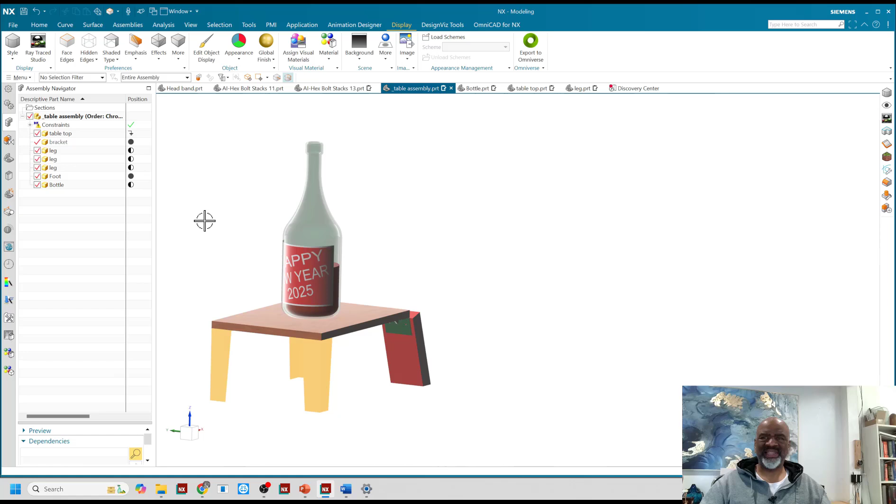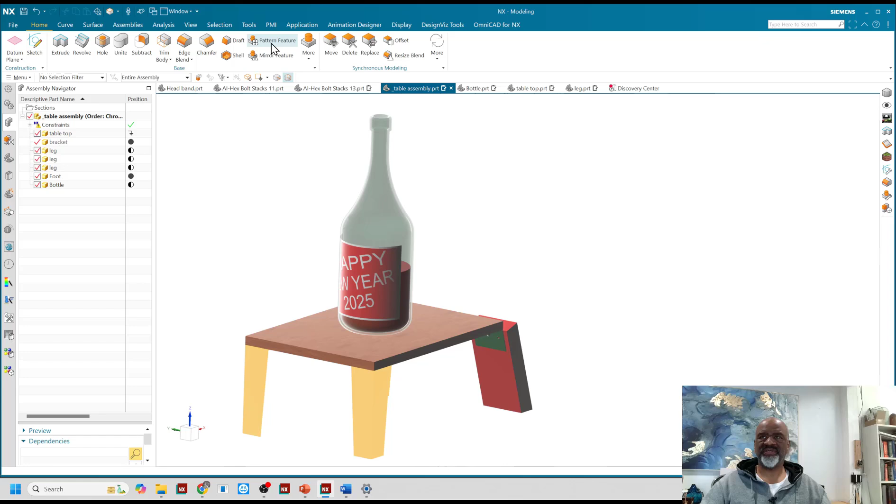Today I'd like to show you a really nice technique. In tools, there's a thing called fastener assembly, and a lot of folks that I know don't really use it. It's incredibly powerful, and in many cases, the best way to start is with a hole series.

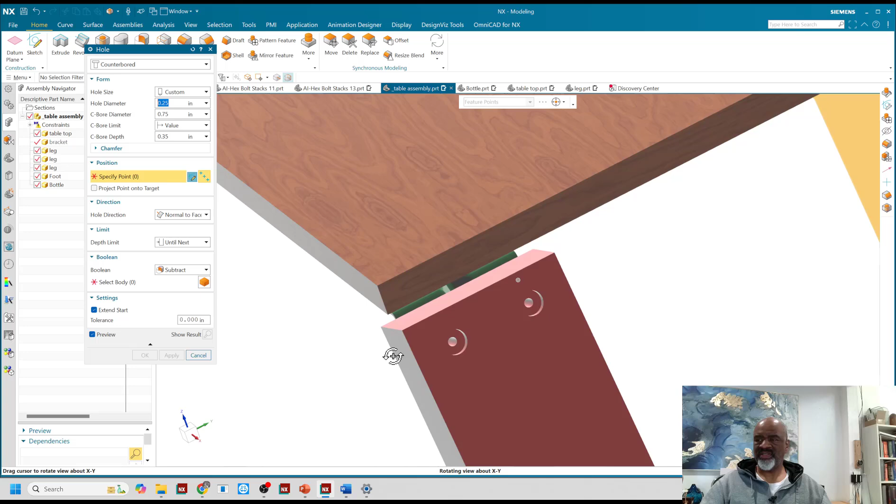I've got a piece of wood here, and I've got these brackets. I'm going to create a hole series that goes right through this piece of wood and into these brackets. As you can see, I've already created a counterbore hole that goes through this leg and through this green bracket. But just to show you how it all works, I'm going to go to the hole series.

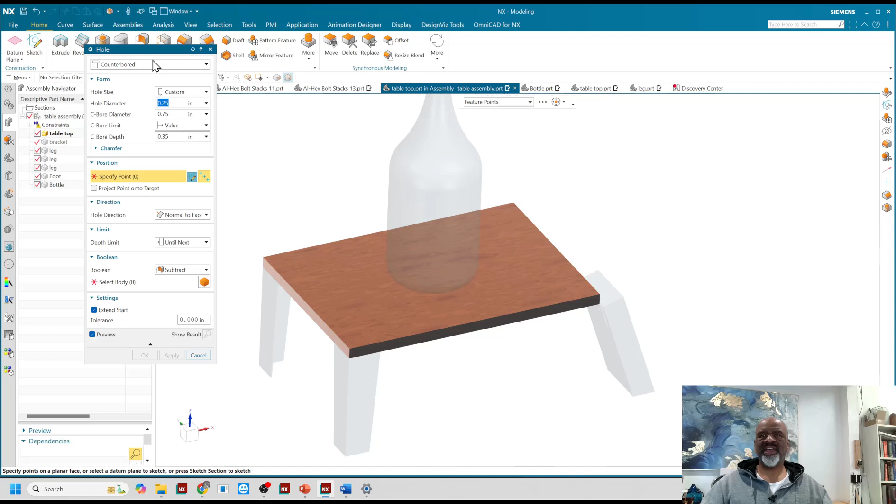Oh, before I do that, I'm going to navigate to the tabletop, because when you do a hole series, you have to navigate to the first piece of geometry that your hole is going to go through. So here I am in the hole command, and right here is the hole series. I love the hole series.

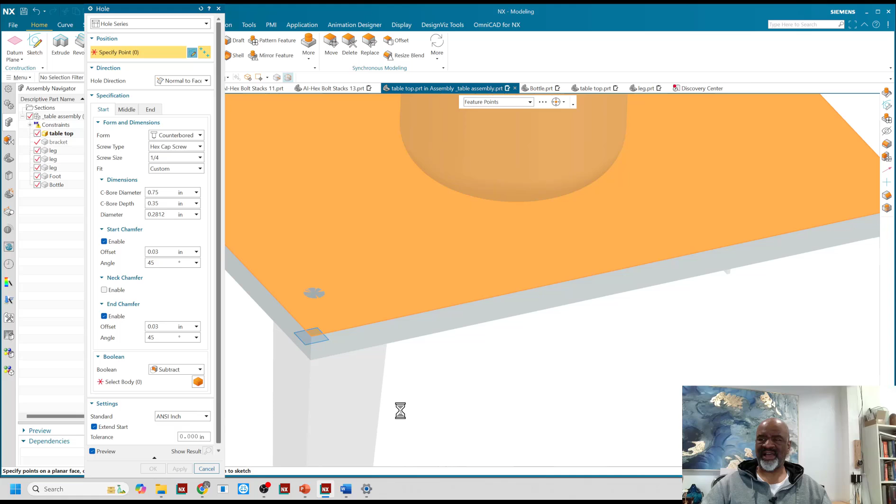And what I'm going to do is a counterbore hole that's based on a 1/4 inch hole diameter. And I'm going to place one right here on the top of the wood when it allows, right there. When I place holes, I like to then go to the sketcher, because the sketcher enables me to position the holes just the way I want, and it'll throw me into the plan view. Awesome. And then I can put another hole right there.

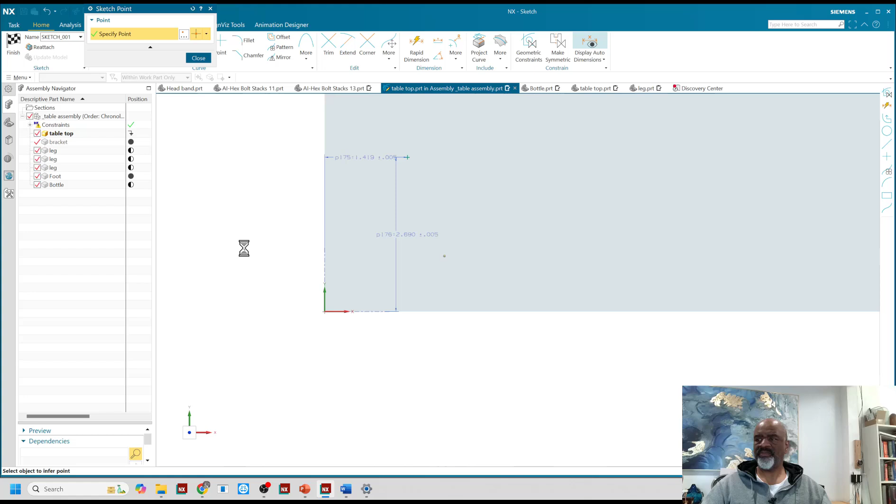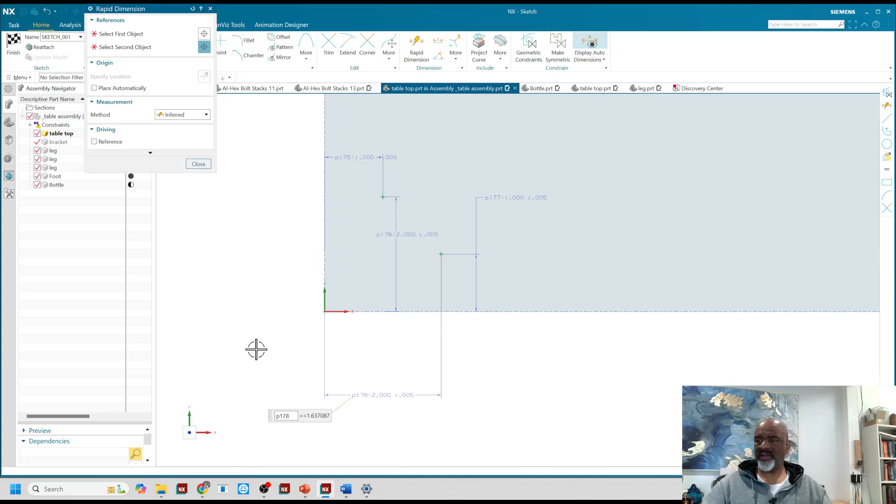And I know that the best location for my hole is if I have 1 inch away from this edge here, and 1 inch away from this edge here. There's a lot of processing of this wood grain going on, so it's reacting a little bit slowly. That's okay. So there we go. I'm going to put those holes there. So 2 inch, 2 inch, 1 inch, 1 inch. Good. Close. Say finish.

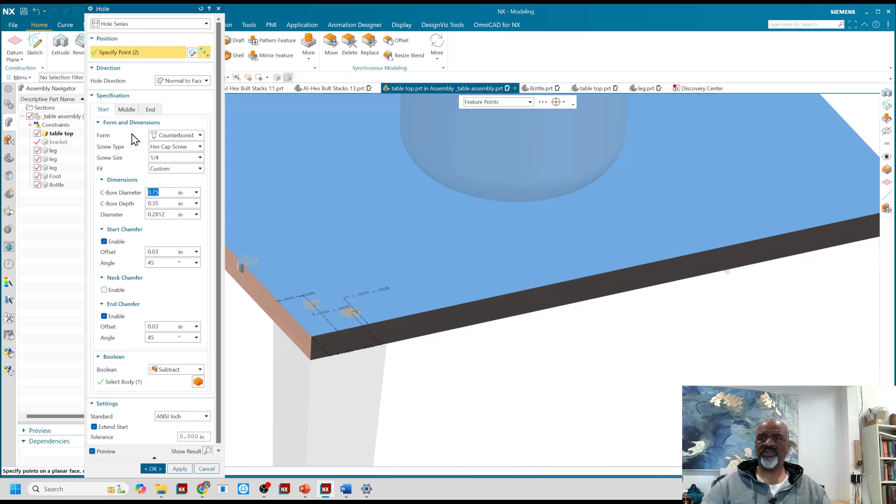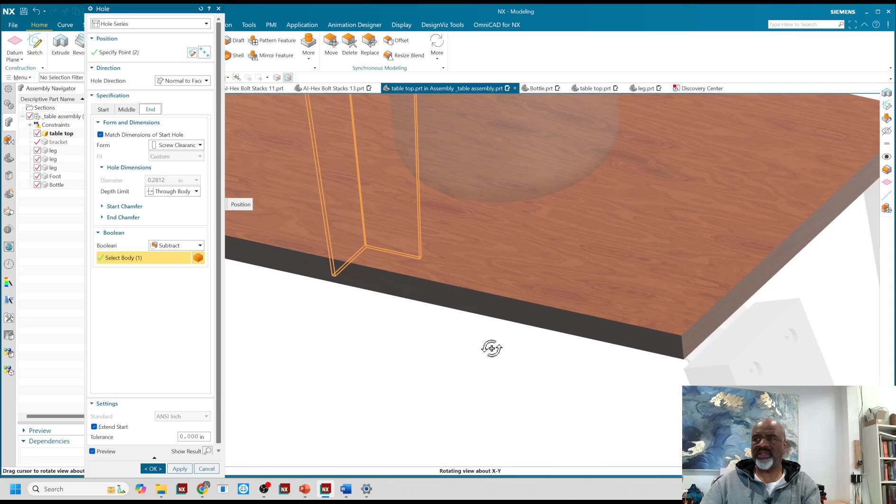All right. So now it's going to pop those holes in. The holes go into the start, if you will. And what it's asking me to do now is go through the sheet metal part. So I click on the end command, end, and I select the sheet metal part. I'm in the assembly now. And of course, I had made the table top my work part. And I'm going to now do a through body screw clearance hole.

And what's going on? Oh, I selected the wrong body, so I'm going to hold my finger on the shift key and deselect. I wanted to select this one under here. There we go. The one to subtract, and I'm going to go through body, and it's given me a little bit of spilkus here. It's saying unable to create tool body, but I know from experience that it's going to do it just fine.

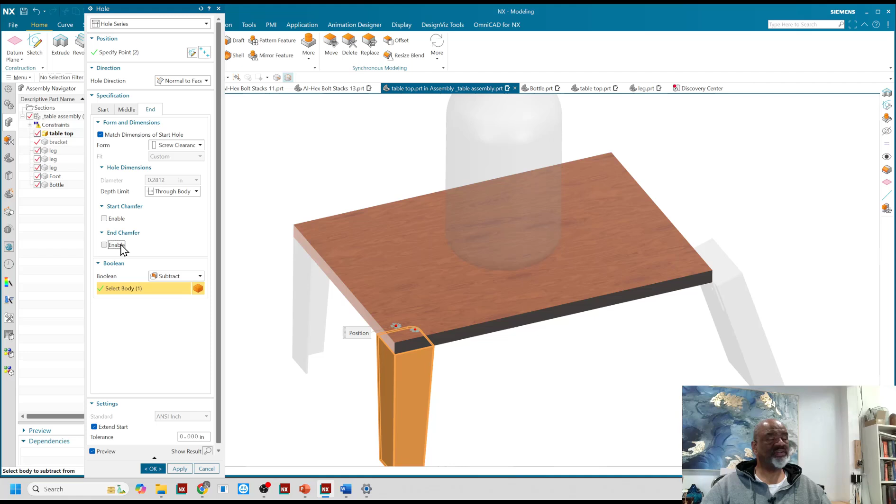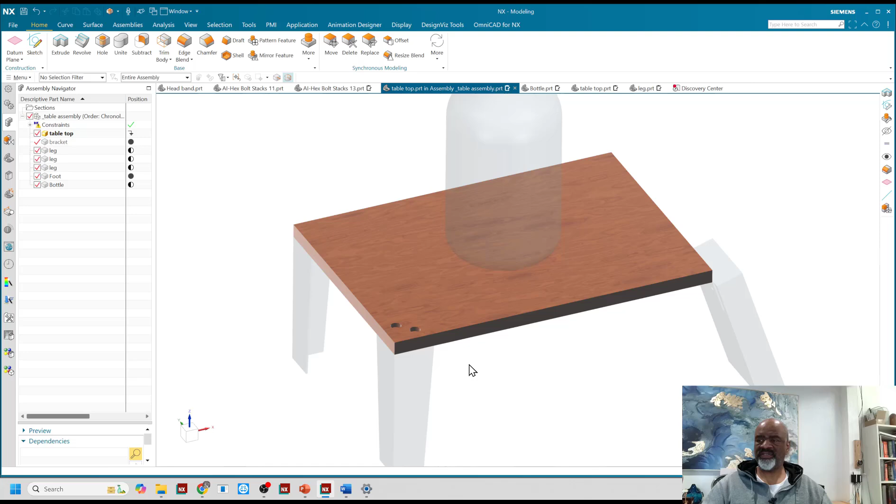But before I continue, I want you to make sure that you take away the chamfers, because the fastener assembly doesn't interact with the chamfers very well. So at the start and at the end, you have these chamfers. I'm going to take them away. So it's just start chamfer, end chamfer. I'm taking all the chamfers off, and then say OK. And it will think a little bit, and it will give us a nice set of holes. So there's the hole in the wood, and there's the corresponding hole in the sheet metal bracket.

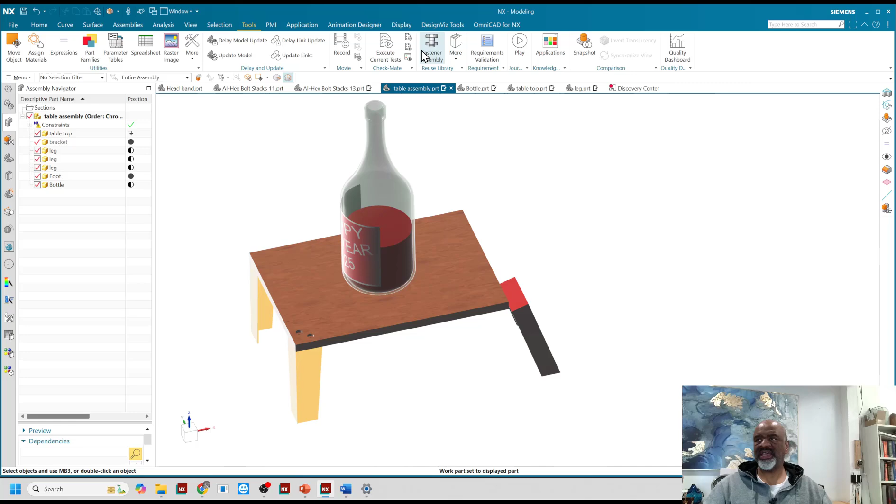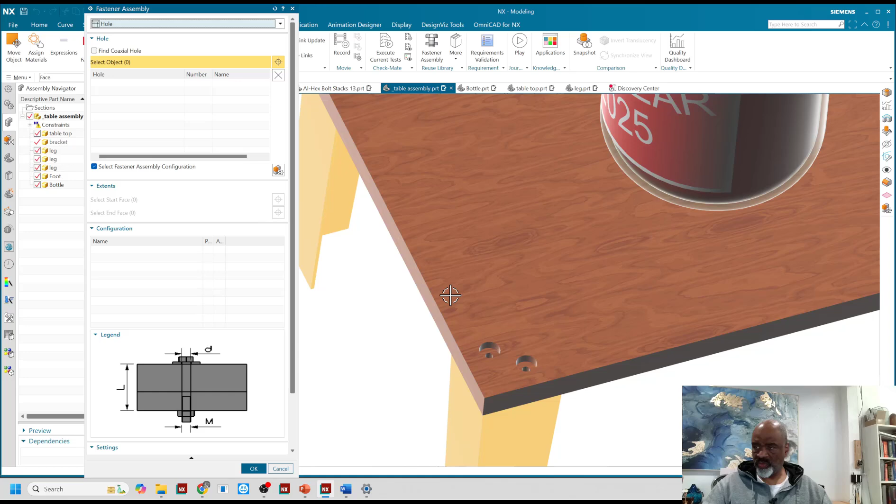All right, beauteous. Now, what's next? So next I go to the tools function, and I go to fastener assembly. And the fastener assembly is really smart, because I have these different fasteners to choose from. I'm just going to go with the standard. I could go into the library and select different fasteners, but I'm going to go with just what's there by default. And what you'll notice is if I select the 1/4-inch holes, and it says start face, end face, it's smart enough to go through and select the end face of my bracket, and then I simply say OK.

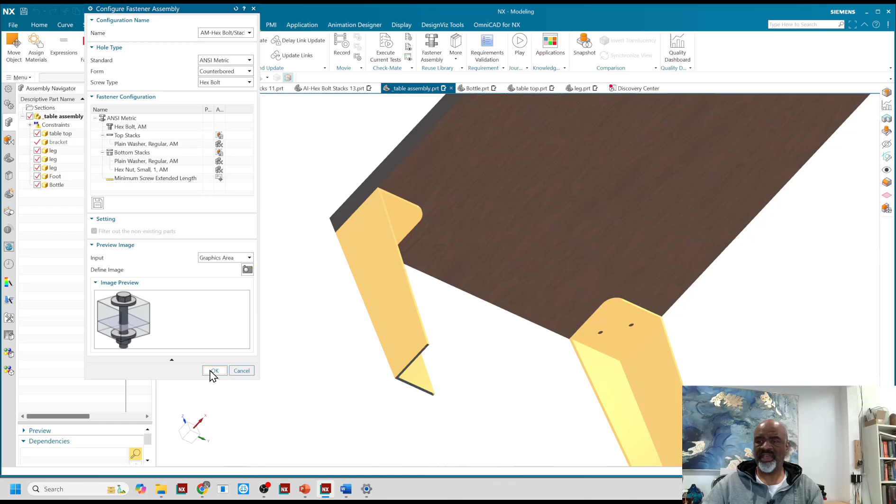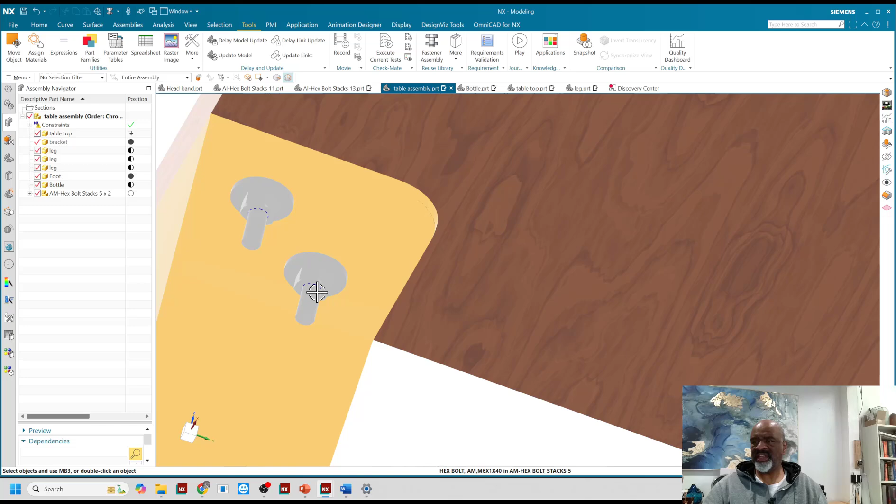When I say OK, it's telling me it's going to do a hex bolt, a top washer, another washer on the bottom, and a nut rather, a bottom nut. And it's showing me the preview, so that's fantastic. And I simply say OK, and it goes off and it does its cool thing. And what you'll see is now it has these screws right here, the corresponding washers in here, and the nuts and the corresponding washers on the bottom. Fantastic. So that's a really nice thing.

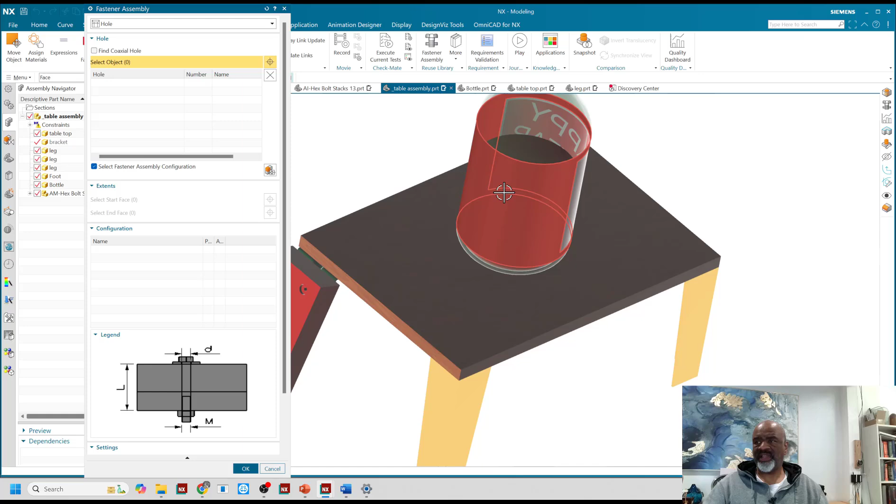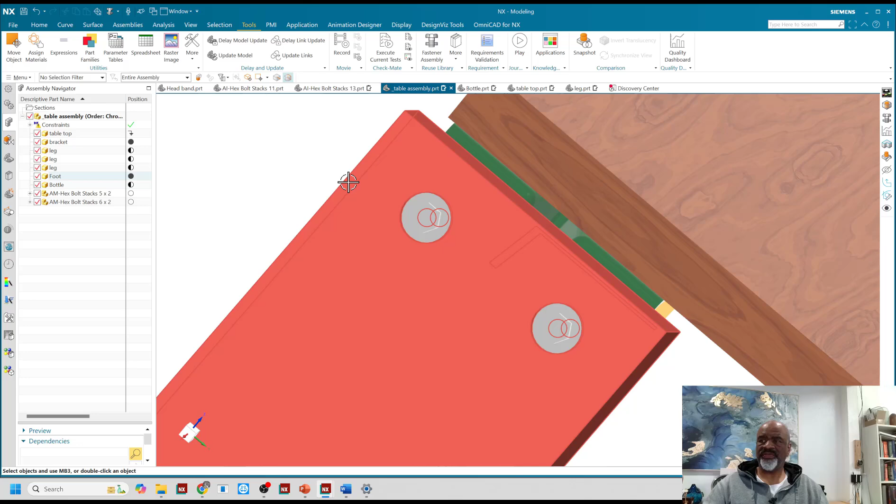If I were hell-bent on finishing this, I would do 2 more holes here, maybe mirror them, and then I would just go back into the fastener assembly and I would select them. But I'll show you that since this piece of geometry is actually longer than the top plate, when I select these holes right there and right there, and I say OK, and I say OK, then it's giving me a different set of fasteners that are long enough to go through and meet that bracket. So this is a very, very powerful tool.

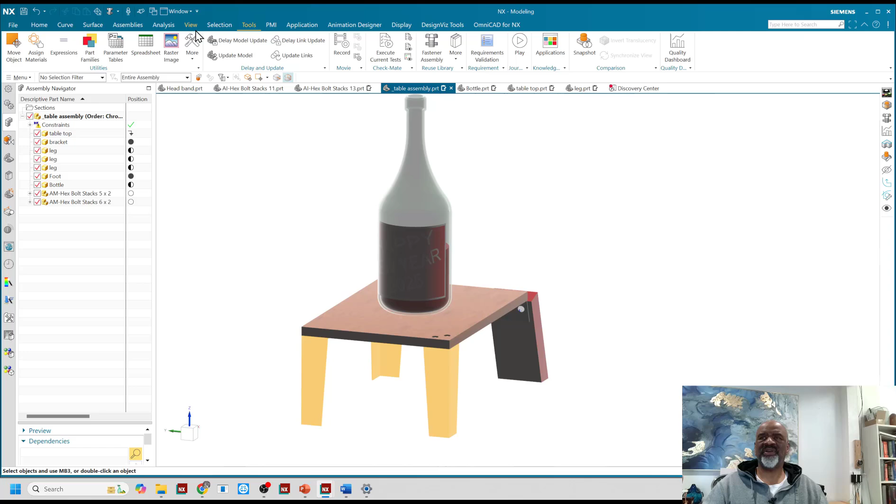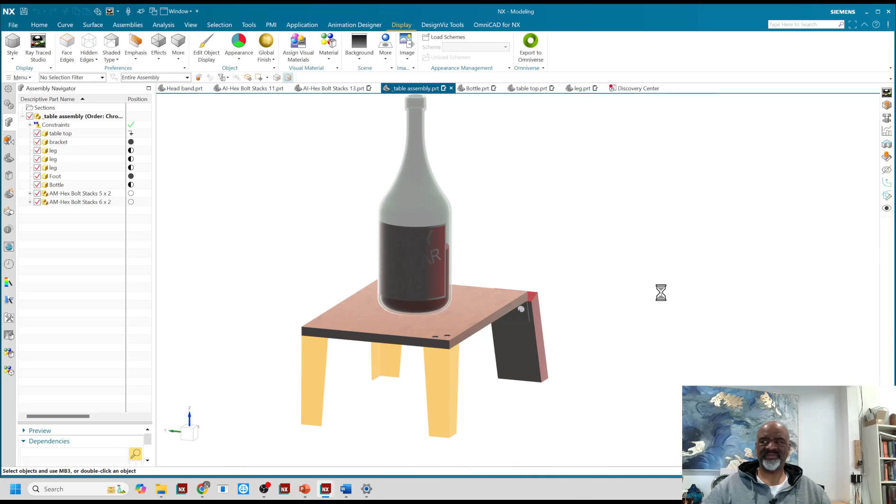And again, this is my Happy New Year 2025 edition. Finally, I'll go into the display and show you the Ray Traced Studio. That should be interesting. And now the computer is going to do a lot of little calculating, and we'll see what happens. Look at that.